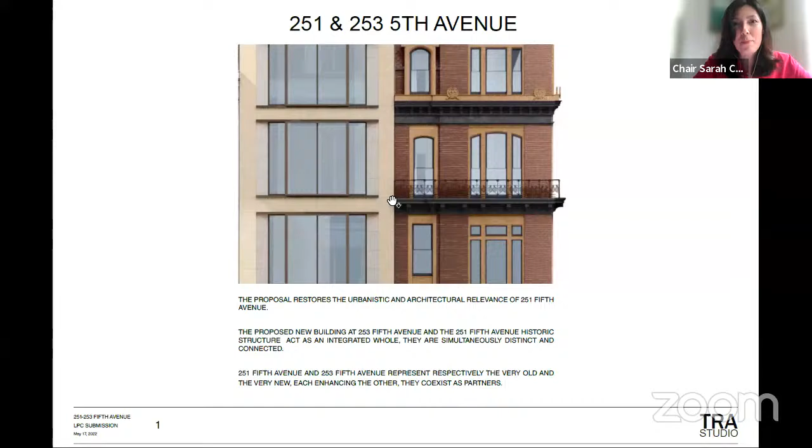Good morning. My name is Caterina Roiatti. Together with Robert Rabosch and Winston Wolf, we represent TRA Studio, the architects for the proposal. With us are also Fred Becker, Owners Counsel, and Isaac Obel-Shalom, whose family has owned 251 and 253 Fifth Avenue for many decades. This proposal entails the restoration of 251 Fifth Avenue as per the 74-711 restrictive declaration and the replacement of the existing 253 Fifth Avenue building with a new mixed-use building.

On the 253 Fifth Avenue lot, careful analysis of the buildings in the historic district provided justification for a taller building without a front setback. Also, given the limited width of the site, a small encroachment over the historic building was deemed appropriate. As part of the declaration, we are asking for modifications for bulk only to propose a straight street wall and a small encroachment.

The site is located on the edges of the Madison Square North Historic District in the middle of a very dense area. It comprises 2 buildings on a merged corner lot. The 251-253 site is urbanistically significant. The buildings will enjoy direct sight lines from the Empire State Building and the Flatiron.

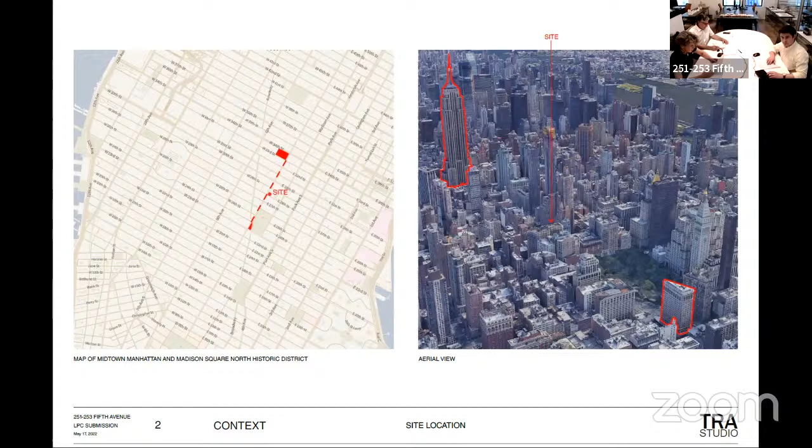The historic landmarks will be visible from both, and just as originally intended, directly from the park. A neighborhood of exceptions: the Madison Square North Historic District is a neighborhood marked by the exceptions to the grid generated by the Broadway corridor, as well as by architectural exceptions, diversified typologies, and a vast collection of styles, materials, and scales.

Buildings range from 3 to 28 stories in height, all attesting to the successive development phases. The Madison Square District is not new to sculptural forms. It is in fact anchored on the south by the very sculptural Flatiron Building and to the north by the Empire State Building. The diversified character of the context, as illustrated in the following streetscape panoramas, could not be more visible than in the area surrounding the site, where the exception is the rule.

The intersection of Fifth Avenue and 28th Street is not a site where appropriateness calls for a design that recedes. Excerpts from the LPC designation report.

251 Fifth Avenue, built in 1872, is one of the earliest surviving apartment buildings intended to attract mostly single men. It was designed in Queen Anne style by George B. Post. As described in the Landmarks Preservation Commission designation report, it originally featured a pyramidal crown with dormer windows that would have been visible from Madison Square Park.

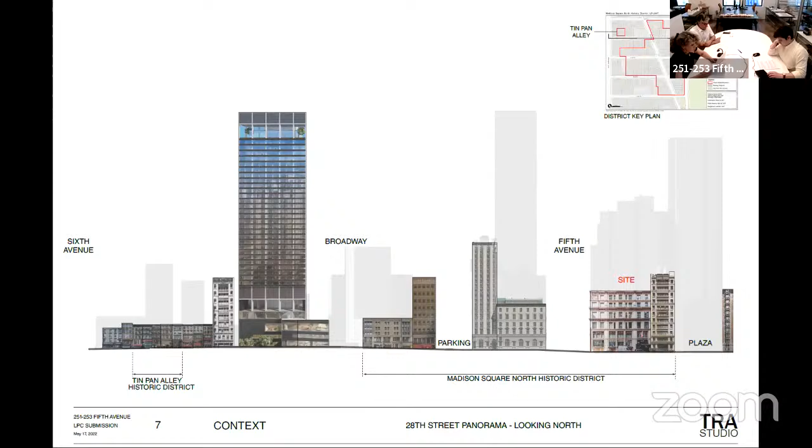It is interrupted again by the hotel parking, followed by the tower, to culminate in the McKim, Mead and White building. On the other side of Fifth Avenue, the district ends with our site and a tall loft building, before the void created by the plaza of a modern high-rise.

The statement, which was discussed at the CB5 meeting, that historic buildings have a tripartite geometry simply does not apply to this stretch of Fifth Avenue. An example of a tripartite facade can be seen at 218 Fifth Avenue. It will be shown on page 12 later.

Panorama, west side of Fifth. Obviously this is not our side of the avenue, but it's interesting because all heights are represented.

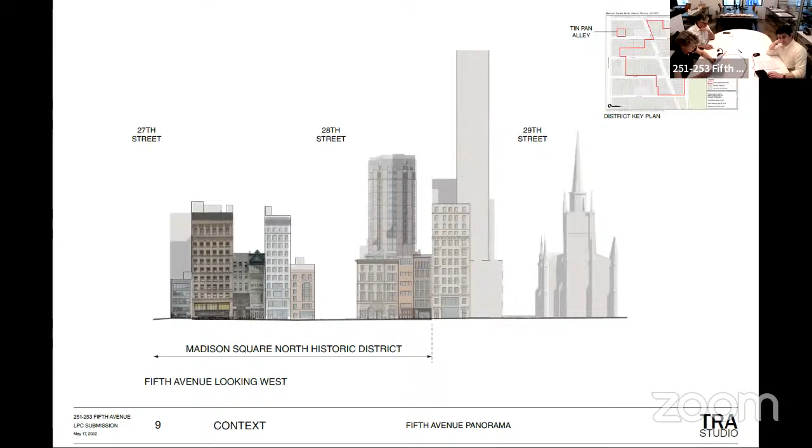Heights comparison of buildings in the historic district. The careful analysis of the existing tall buildings enabled us to build a strong rationale for proposing a taller building on the 253 Fifth Avenue portion of the site. The heights of the proposed building will fit in with a variety of heights found throughout the historic district, which reach 28 stories.

The proposed development, comprised of a tall tower and a lower building, is in harmony with the massing of the buildings in the district. Tall buildings in the historic district all have a strong street wall, rising without a lower setback.

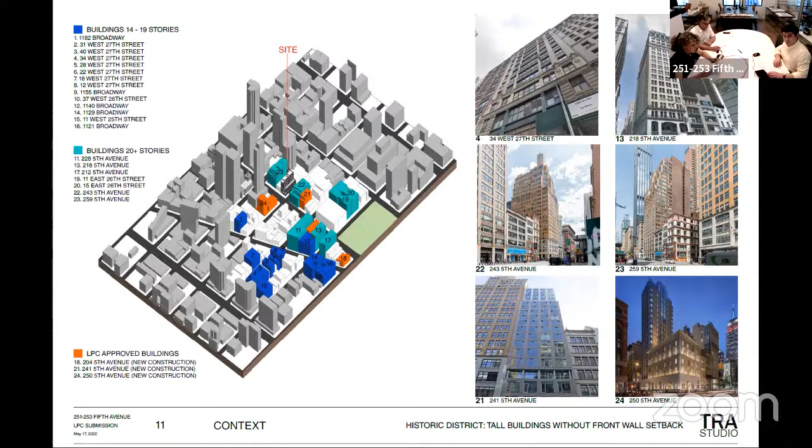Surrounding development: the zoning mechanism applicable on a wide street is the tower on a base. This massing does not exist in the district—it's essentially a modern approach based on requiring setback at the lower levels. The developments in the surrounding area that apply this zoning massing have not been successful, as seen at 309 Fifth Avenue, bottom right of the page.

Important to notice that the views from our site to the Empire State Building have been preserved through the forest of tall buildings that have been built or will soon be built.

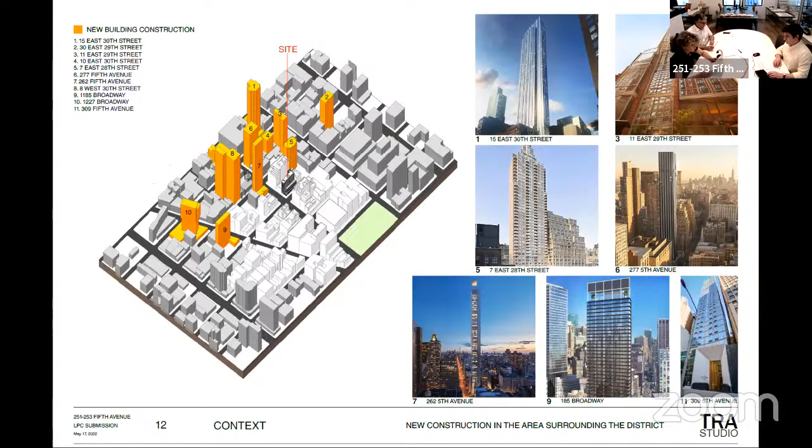Robert? Hi, my name is Bob Trebosha. I'm going to go through the 253 new building.

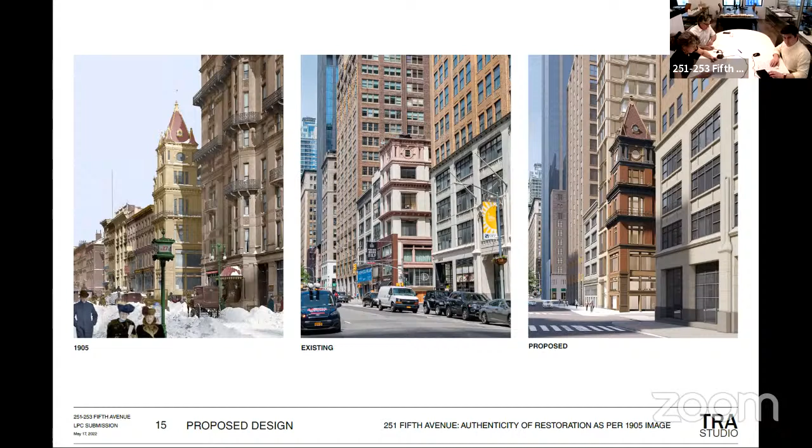Strategic massing: the R10 zoning allows, with inclusionary housing, a maximum of 12 FAR, 89,100 square feet, plus mechanical deductions. The zoning mechanism applicable to a wide street is a tower on a base.

This massing does not exist in the district—it's essentially a modern approach based on requiring a setback at the lower levels. The developments in the surrounding area that applied this zoning massing have not been successful.

The design of 253 Fifth Avenue was guided by the idea that the air parcel above the historic structure contains DNA data to inform the design of the new building. In particular, the slopes that define the pyramidal crowns and the mansard roof extend and sculpt the new structure, tying 253 and 251 Fifth Avenue into an integrated whole.

The uneven grid and controlled asymmetry of 251 extends through the 253 facade. The old and new buildings are obviously different in scale, but they are indeed in harmony.

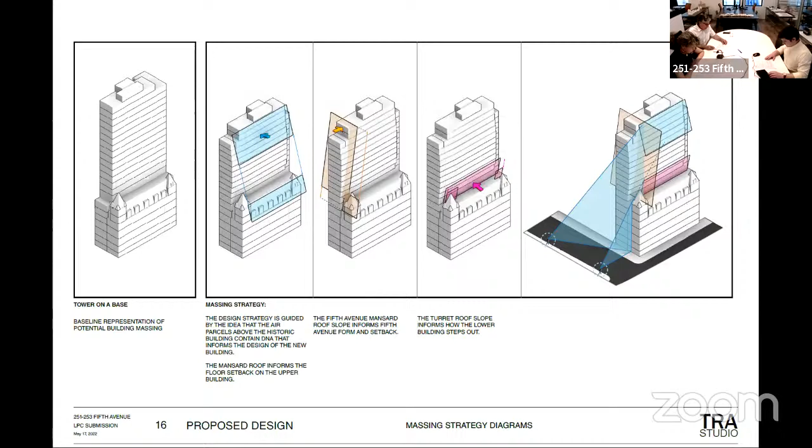Within the sloped planes, 253 Fifth Avenue sculpts itself into a form that is at once innovative and reminiscent of the mansard roofs and step setbacks found in the area. The proposed building is in alignment and at scale with the streetscape.

Building facts. The proposal entails a full restoration of 251 Fifth Avenue as per the 74-711 mechanism, which offers to request a variance for the proposed new building for bulk only.

TRA proposes the replacement of 253 Fifth Avenue with a mixed-use building whose massing reinforces the street wall. A small encroachment is proposed on the north side of 251 Fifth Avenue. The first three floors are commercial with residential above.

Approximately 88 apartments are proposed, of which 30% will be affordable housing units. These units will be interspersed throughout the building, bringing much needed apartments to an area that was, before becoming commercial and manufacturing, a vibrant residential neighborhood. This is certainly an area that can support the additional density and benefit from the introduction of additional residential units, including an affordable housing component.

Floor plans. The elevator is moved away from the historic building, minimizing the impact on the adjacent historic structure. This somewhat unusual move also allowed for very efficient layouts that take full advantage of the south wall legal light and air. The balance of the party wall between the two buildings is maintained at the lower commercial levels.

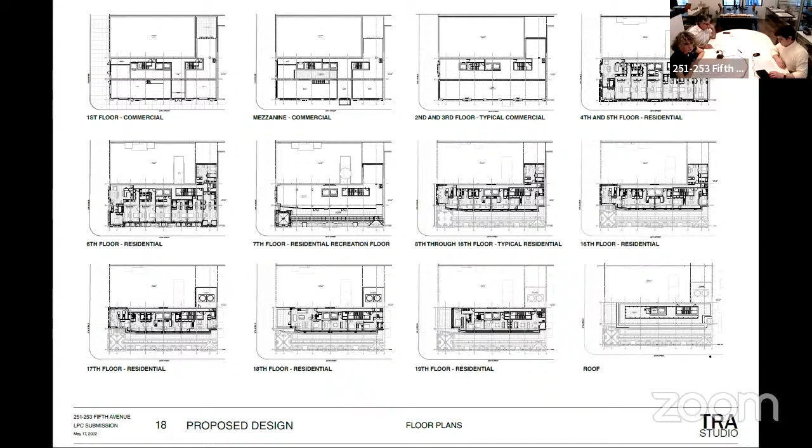The small encroachment of about 6 feet 6 inches was demonstrated to be necessary to create a variety of apartment sizes, with the smaller studios located in the narrower sections of the building.

Cantilever precedents. The site of the new building is only 24 feet 9 inches wide. Early in the design process, it was understood that a small encroachment over the historic structure could be considered. A review of past approvals demonstrates that buildings with rather large cantilevers have been approved in historic districts before.

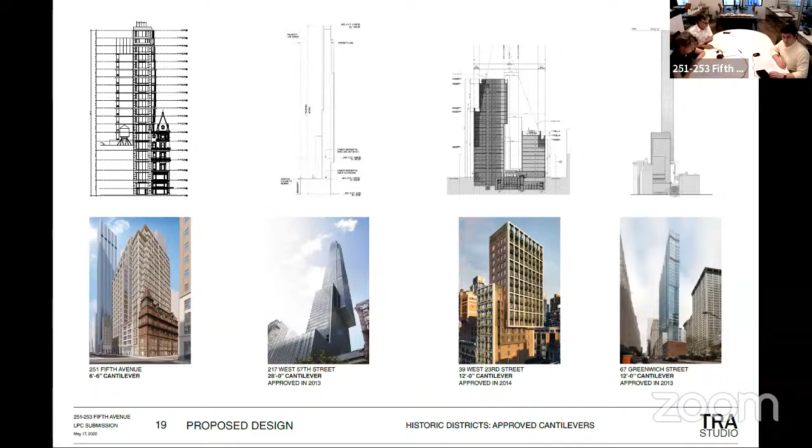It is characterized by large windows that mark the commercial use, set within strong mortar-set terracotta tiles. The facade dematerializes on the upper floors into smaller windows and glazed shaped terracotta tiles. The top is stepped, similar to the other tall buildings on this stretch of Fifth Avenue.

The design of the south wall, which takes full advantage of the available legal light and air, recognizes that since 251 Fifth Avenue can never expand vertically, it is not just a demising wall, but rather a facade. Similar historic examples are referenced in the presentation.

On the 28th Street side, the window wall rises into a large dormer, a gesture similar to the top dormers of the adjacent building. It also shifts the weight of the building away from the Fifth Avenue main facade.

The modular organization of the facade, taken from the Queen Anne style of the 251 facade, is regular but not exactly symmetrical, without a center axis. A muted palette is chosen both to harmonize with the masonry of surrounding buildings and to provide a backdrop to a vibrantly colored historic building, enhancing its significance.

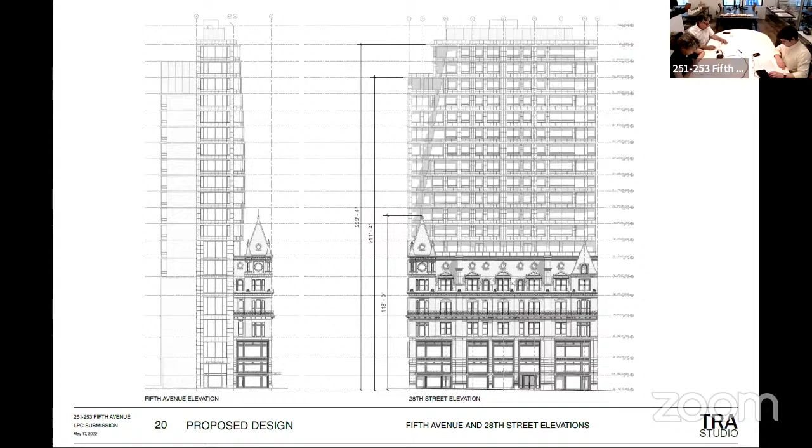The corner site provides ample justification for the bold transformation of both 251 and 253. Together, they celebrate the historic grandness of form and the extravagance of the diverse neighborhood context. Traditional materials are used to create a new form. The design finds connections, not replication.

The architectural assembly and composition of the new building's facade weaves together and celebrates the varied forms of architectural expression in the district. The somewhat uneven grid, the surprisingly slightly asymmetrical geometry of the historic building, and the variety of recesses guide the design of the new building.

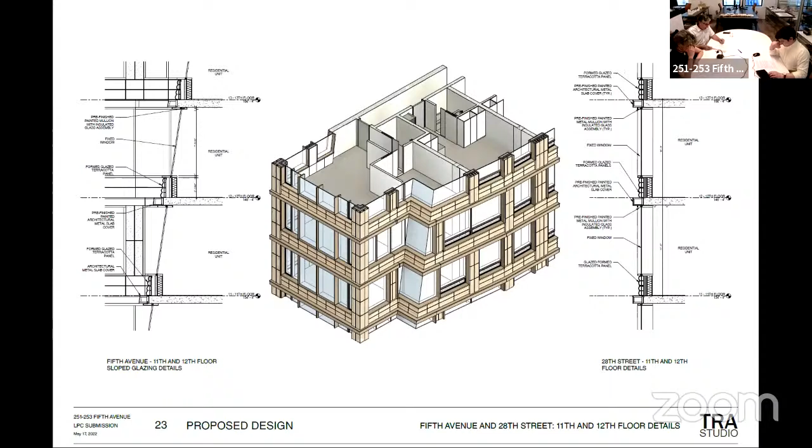253 Fifth Avenue, window wall close-up. The Fifth Avenue strong base establishes a clear hierarchy between the primary and secondary facade. In contrast to the flat mortar set tiles that clad the base, the secondary facade is clad with shaped, multi-layered glazed terracotta panels, whose extruded forms recall the scoring and abstract patterns found on masonry buildings located throughout the district.

253 Fifth Avenue, close-up of 28th Street window wall. The residential floors' fenestration is characterized by grouped windows. The abstract decoration, which creates an interwoven effect at once repetitive and varied, is obtained through restrained gestures. Only one extruded glazed terracotta panel and one type of unglazed flat terracotta panel tile are utilized to produce a facade evocative of historic detailing, maintaining contemporary and timeless expression.

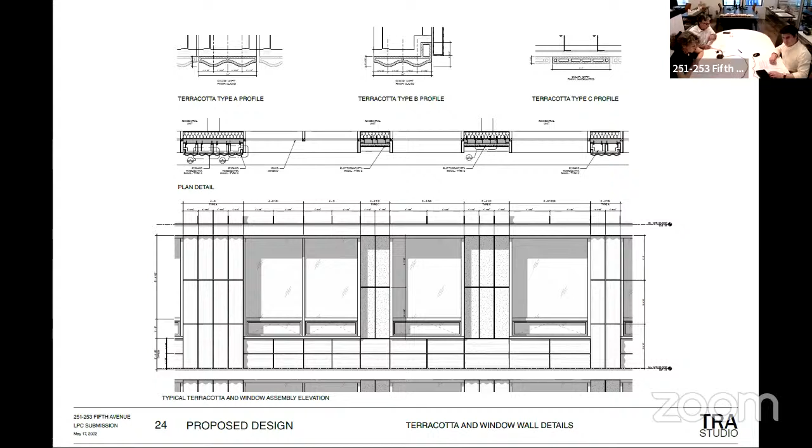253 Fifth Avenue, close-up rendering materiality. The modular organization of the facade and the muted palette is chosen both to harmonize with the masonry surrounding buildings and to provide a backdrop to the vibrantly colored historic building, enhancing its significance.

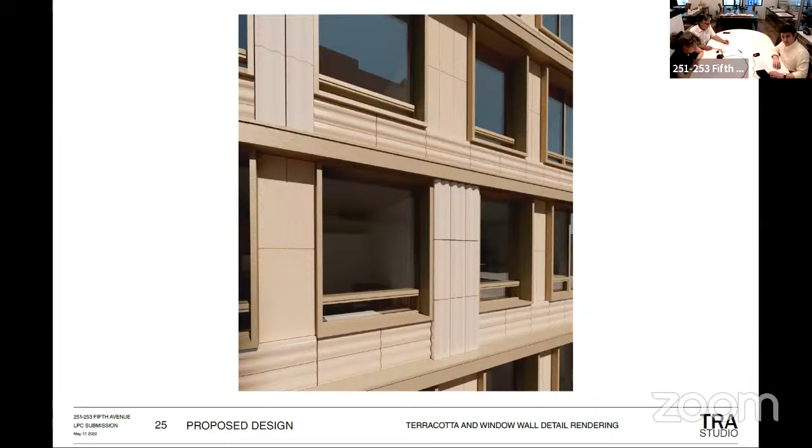253 Fifth Avenue, close-up of 28th Street window wall upper floors. The 28th Street facade extends into what can be called a larger dormer. Similarly to the Kaufman Building 261 on the same block, note that the mechanical volumes are minimal. We took advantage of the oddly shaped dog-leg lot to locate the mechanical volumes away from the main facade.

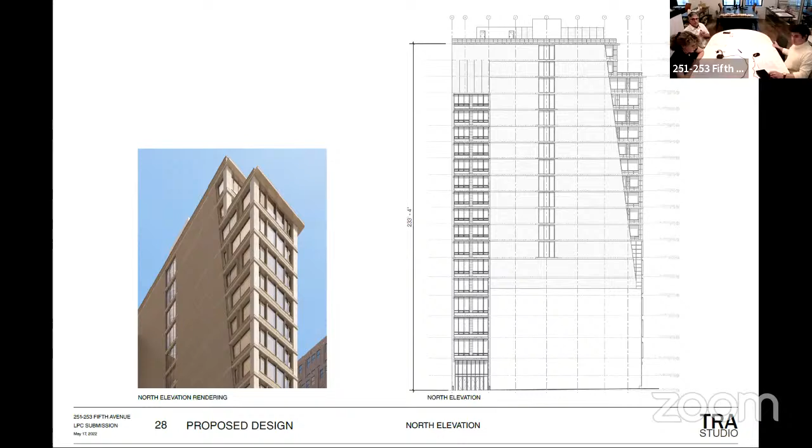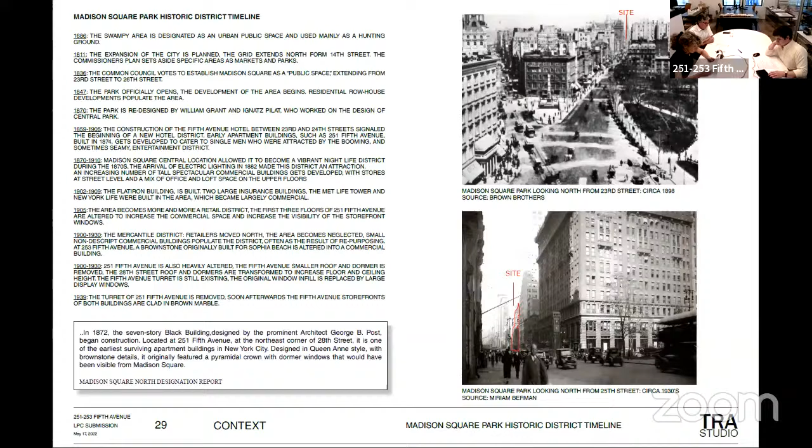Restoration of the 251 Fifth Avenue building. Historic District Timeline: the history, culture, and changes in the architectural landscape are reflected in the history of 251 and 253 Fifth Avenue. The image on top shows the district as seen from the park in 1898. The flamboyant sculptural rooftops were meant to be seen from Madison Square Park. The image below, which dates from the late 30s, shows 251 Fifth Avenue, even when surrounded by massive structures, remained recognizable as a landmark.

The Landmarks Preservation Commission stated that the authenticity of the restoration should replicate as close as possible the conditions of the 1905 photograph. In 1907, the mansard roof was removed, but the turret remained. The upper floor windows have been modernized.

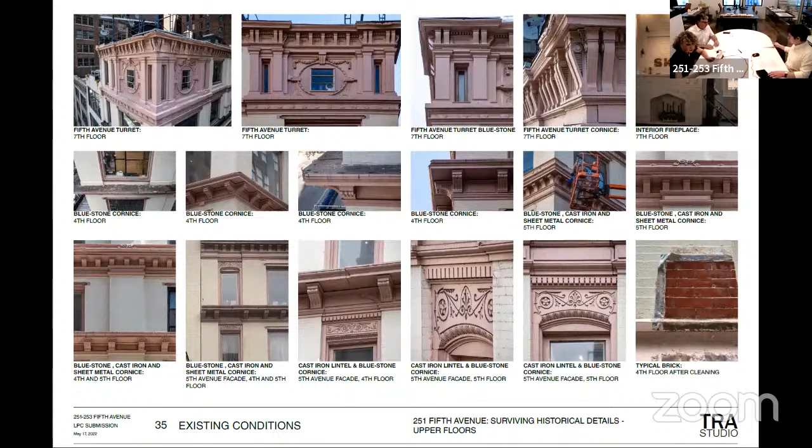Material analysis. Differing wall textures and mixed media materials are typical of the period and of this style of building. Currently, everything's coated in paint.

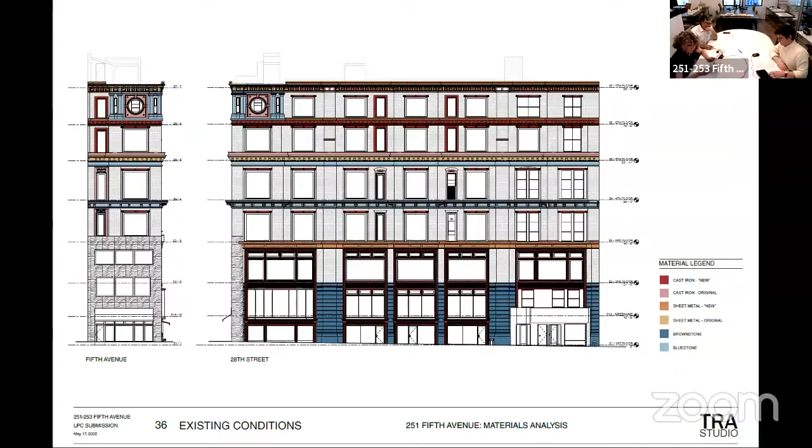The probing via boom allowed us to catalog the pieces as shown in this page, mapping the original surviving elements.

Preservation always requires us to choose what to keep and what should go. This is our mapping of the facade, guided again by the intent to adhere to the 1905 image.

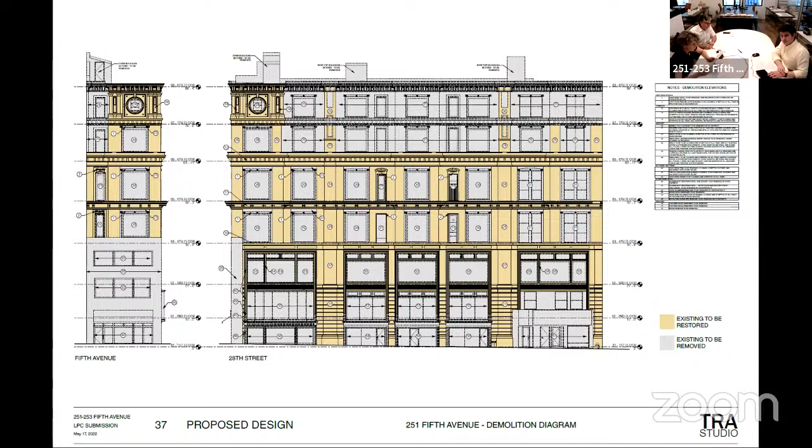Proposed restoration. The original storefront, transformed in 1905 following the repurposing to commercial use, comprises the first mezzanine and second floor. The storefront seen in the reference image shows large expanses of glass, a feature recognized in the restoration. The details of the new infill are in kind with the surviving elements.

On the third and fourth floor, the original tripartite windows, still visible in the 1905 photos, were soon after gutted to allow for more visibility to the commercial spaces behind.

The proposed restoration entails the restoration of the cast iron lintels and wood double-hung windows, as seen in the 1905 photograph, with the detail and depth of the window assemblies.

The restoration also recognizes the urbanistic significance of reproposing the reconstruction of the rooftop elements in natural slate roof. A long metal and glass skylight, not visible from the public way, gives light to the loft apartments below and conceals the rooftop railing and recreation terrace behind.

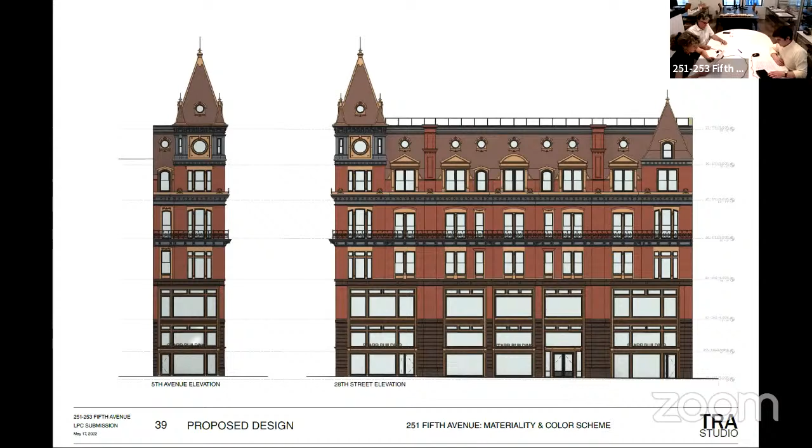Materiality paint analysis. The original red brick facade, brownstone and bluestone cornices will be returned to their original unpainted state. The contrasting proposed paint colors are based on careful microscopic paint analysis.

The proposal provides a handicap accessible entrance to the historic building. Currently, the retail is located approximately 48 inches below the sidewalk.

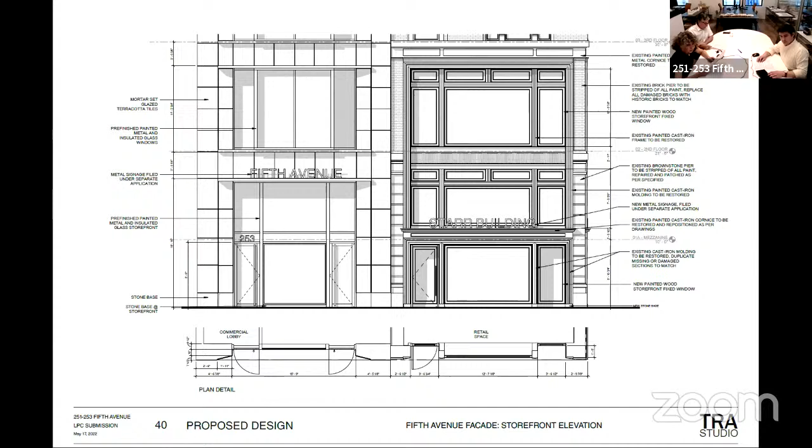Existing elements are to be reused and any new elements will be replicated in kind. Storefront mullions will be painted wood.

Storefront details. The storefront occupies the first floor, mezzanine, and second floor. The storefront seen in the 1905 reference image shows large expanses of glass, as we said, a feature that...

Our meetings with the staff indicated needed to be recognized in the restoration. The details of the new infill are in kind with the surviving element.

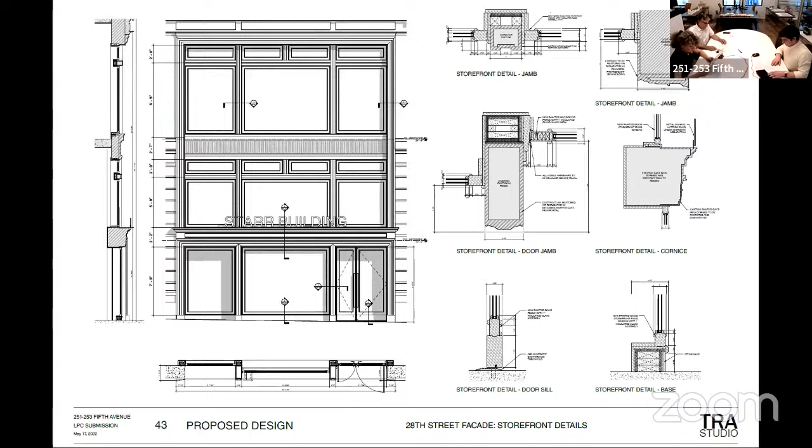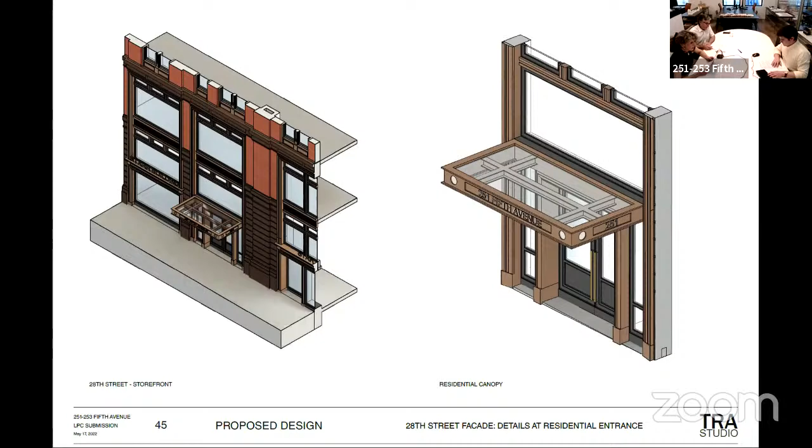Axonometric marquee detailed view. The integration of the marquee brings functionality to the historic storefront. The modern design is simple and strikes a balance between the historic and the new use of the storefront.

Marquee details. The proposal includes concealed minimal perimeter lighting.

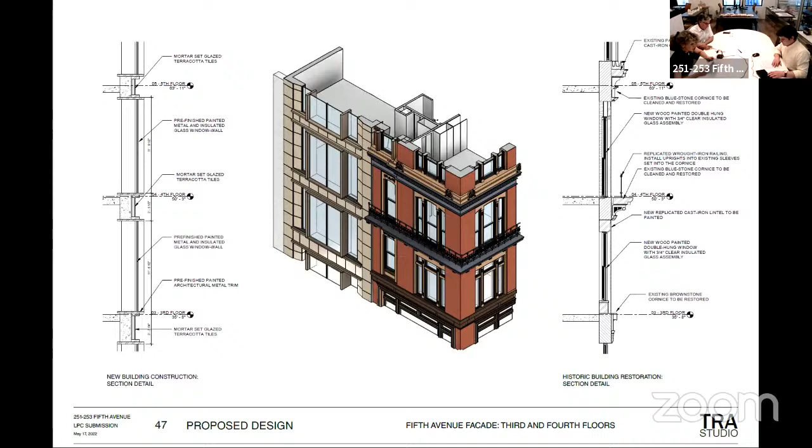Residential floors. The third and fourth floor facade, seen here of the two buildings side by side, shows that the new and historic windows find a dialogue. They share depths of fenestration, natural materials, and scales.

Residential window detail, this is of course 251. The introduction of the cast iron lintel and columnettes that had been gutted to allow for showroom windows is re-proposed. They will be replicated in kind.

The windows, as we said, will be wood double hung, painted in the original black-green color.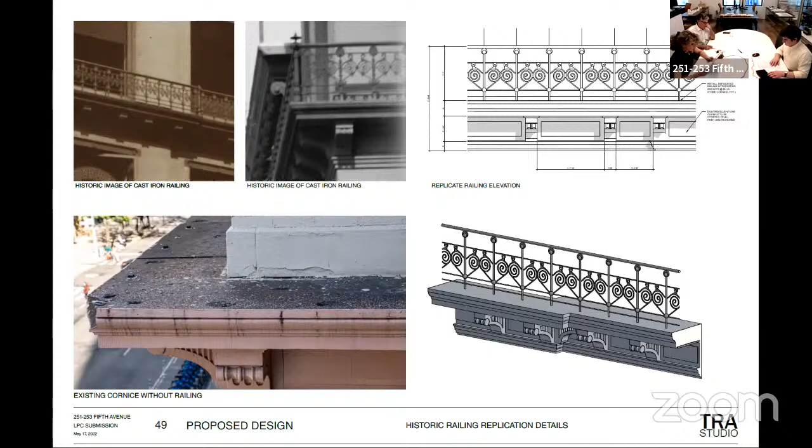Railing. The memory of the railing sockets in the bluestone cornice are still visible. This enabled the modulation of the railing to be exactly determined in order to replicate the railing in kind.

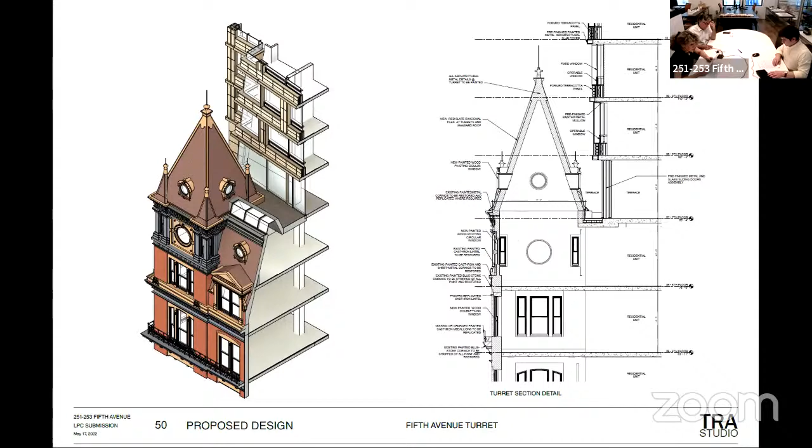Axonometric view of the turret reconstructed. The mansard, turret, and flat roof are to be reconstructed as per the 1905 condition documented in the photographs. The window wall of the new building recedes at the roof level to recognize the turret.

Oculus details of the turret. The probes uncovered several architectural details in blue stone. Blue stone was used where structural considerations were a concern. The proposed design leaves the blue stone in its natural state.

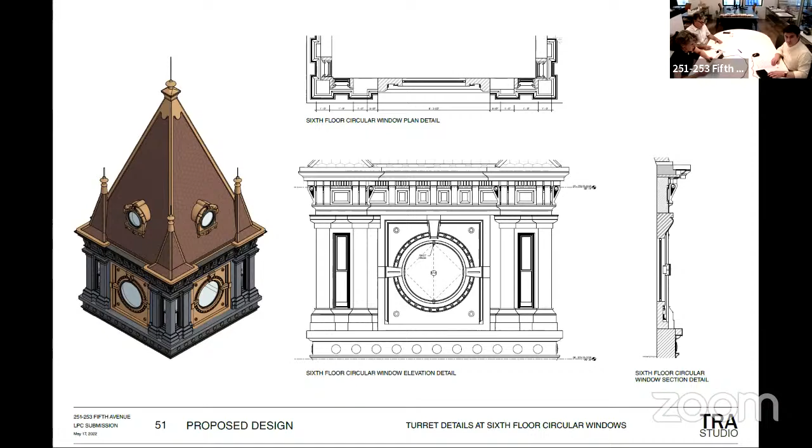Skylight. A metal and glass skylight, not visible from the public way, gives light to the loft apartments below and conceals the rooftop railing and recreation terrace behind. The study shows that the skylight is minimally visible from the public ways.

Ocular windows. Reconstructed ocular windows and surrounding area are to be replicated. The windows will be operable and pivoting, and of course, wood.

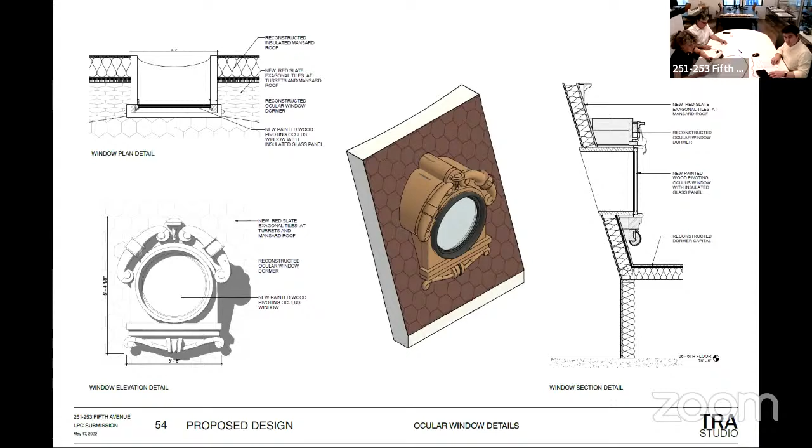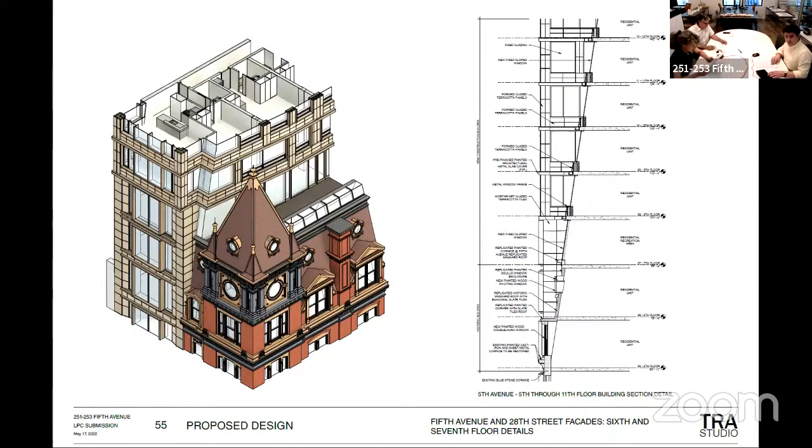Connection between 251 and 253. The reconstructed Fifth Avenue mansard roof, which you can see in between the two buildings, reaches up to establish a dialogue between the historic and new elements. Dormer details: the reconstructed dormer and surroundings are to be replicated. The dormers will receive operable double-hung wood windows.

251 and 253 together, two buildings as partners. Materiality: the historic building restoration is informed by the existing materials and paint analysis. They include bluestone, brownstone, brick, wood, cast iron, galvanized metal, and slate. Most materials would be left in their natural state.

The materials proposed for the new building are historically used in the district. They include terracotta brick, stone, and metal.

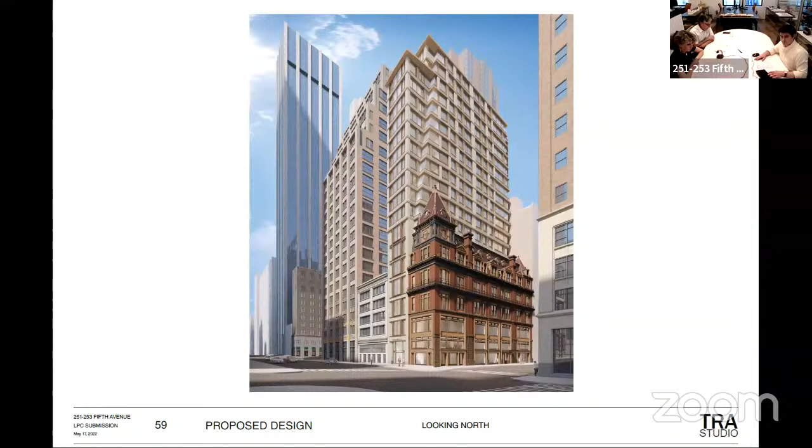View looking north. The new building is both appropriate and harmonious within the architectural landscape and provides a setting for the historic building. Fifth Avenue elevation view: the new building is in scale with the surrounding buildings. The reconstructed turret has a clear silhouette that will remain clear against the skyline.

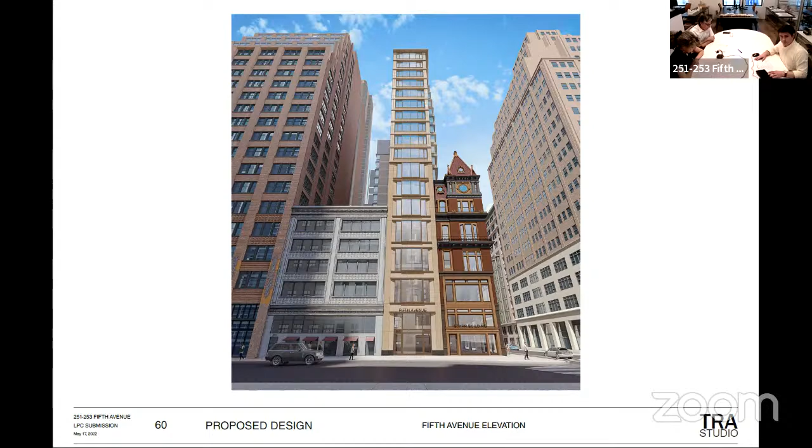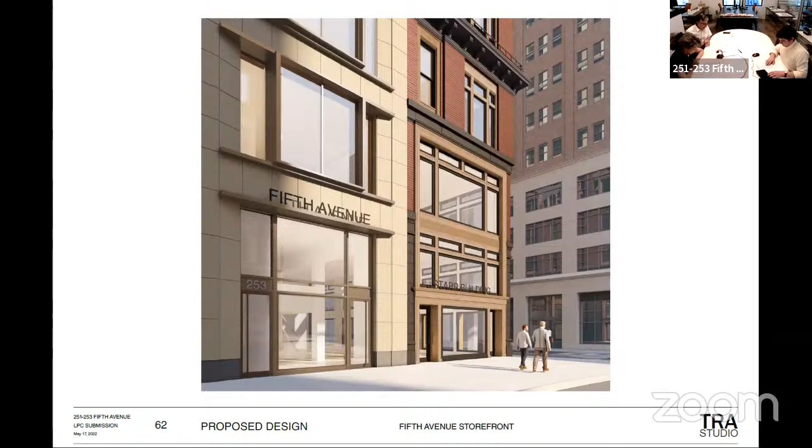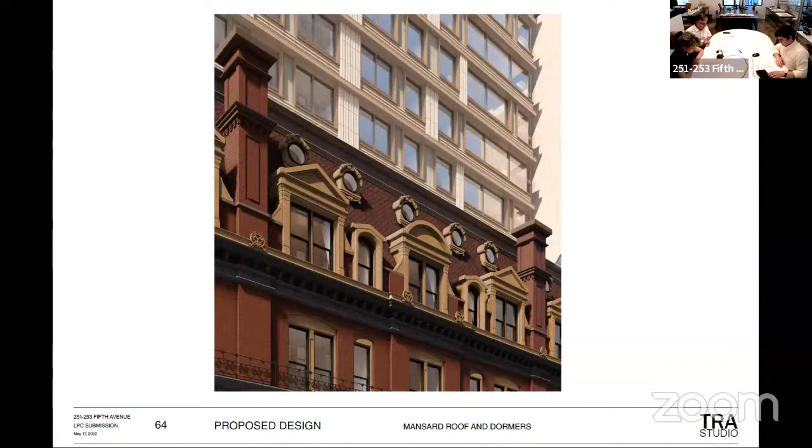Views of the mansard roof. The new building provides an appropriate setting for the vibrantly colored historic structure. The detail and depth of the new window assemblies reference the richness of details in the historic building. The restored turret: a close-up view of the turret highlights the sculptural form of the reconstructed historic building.

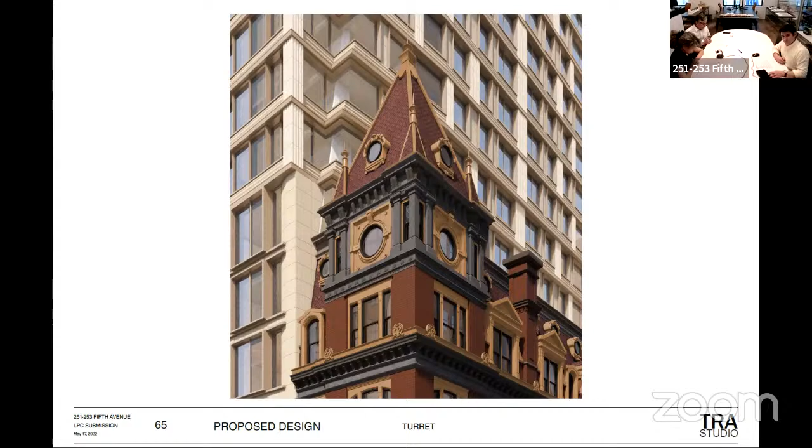Rendering. Significance in the streetscape: vista up Fifth Avenue with views of the Empire State Building.

The regeneration of 251 Fifth Avenue is a statement of urban regeneration. 253 Fifth Avenue enhances the presence and significance of the corner site and historic landmark. Together, the new and historic buildings add to the public realm.

Thank you. Thank you. For it.

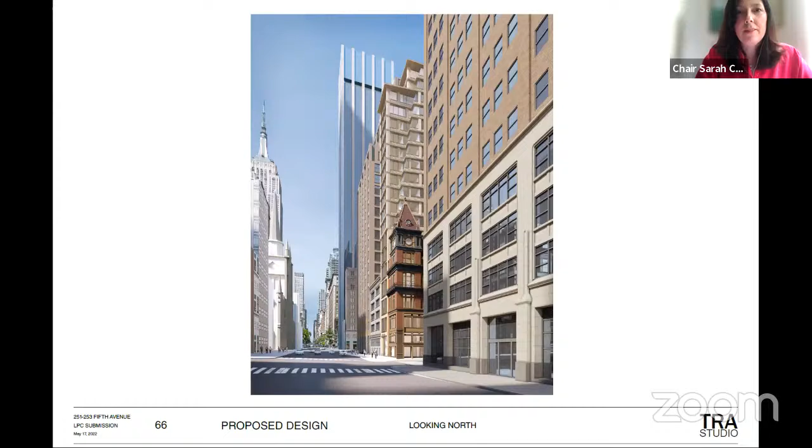Okay, great, commissioners, do we have any final questions? I'd just like to make one point about the cantilever. The cantilever yields to the post building. We do not believe that a projection off a building at 90 degrees is an appropriate solution for this cantilever. We sensitively developed this cantilever to move with the gesture of the post building. So in our eyes, the appropriateness and creativity of this cantilever is in keeping with the creativity of the post building in its day when it was built. This is a site that wants creativity, imagination, forward thinking, and I can't think of any other way to present this building in light of the challenges that we had to overcome to even consider a building that wasn't a plain box.

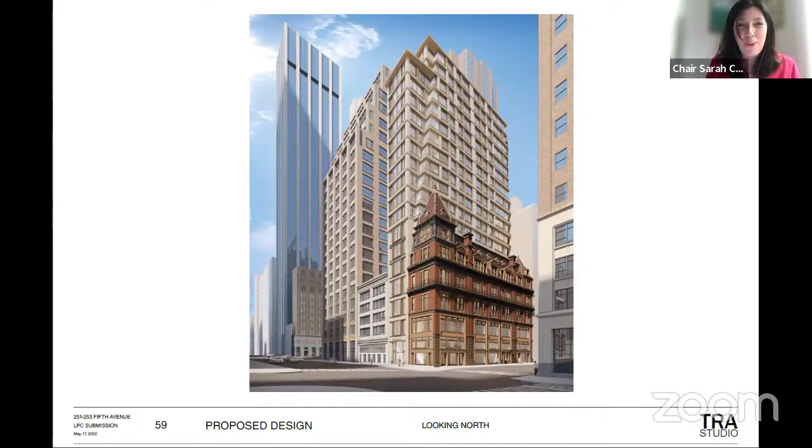Okay, we'll now do public meeting item number 3, LPC 22-07348, an application for a certificate of appropriateness in the Borough of Manhattan, Block 1389, Lot 45, 38 East 75th Street in the Upper East Side Historic District. This is a row house designed by Thom and Wilson and built in 1881 to 82, altered by John Ingle in 1926. The application is to replace and redesign the front facade and construct rooftop and rear yard additions. This was last presented at the public hearing of May 3rd, 2022. No action was taken at that time, and the applicants will begin the presentation after we open the proceedings.

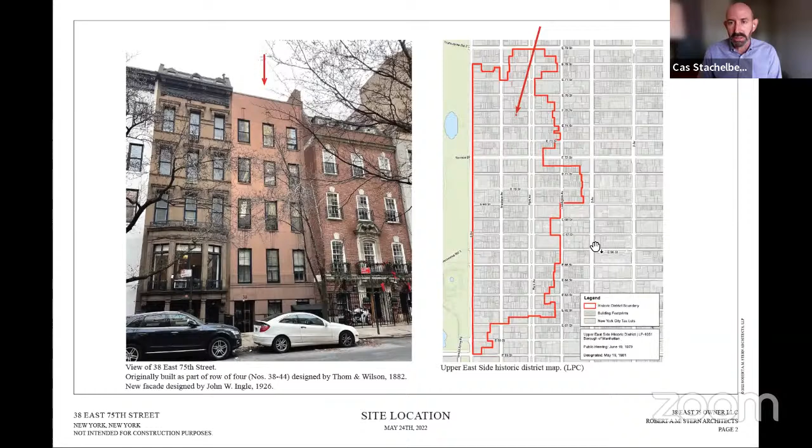Gary's going to share the specifics of the changes we've made, but I'd like to start by noting that we heard your comments. There were comments about a perceived heaviness and a lack of delicacy, and as is so often the case, absorbing your comments and responding to them has resulted in what we think is a better design.

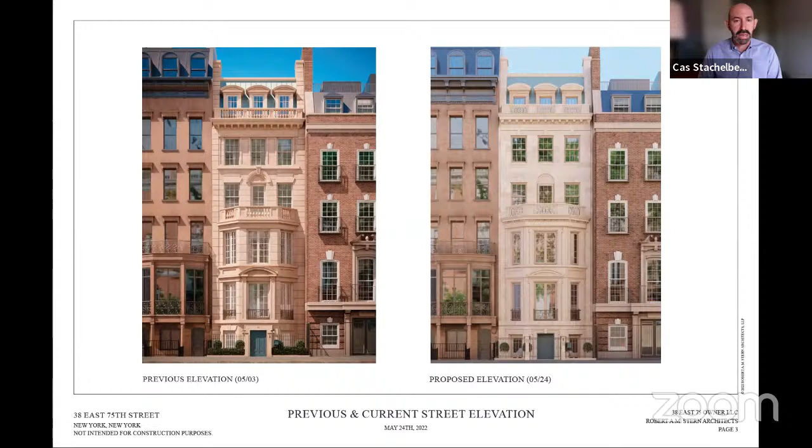What we shared with you at the public hearing, you can see here on the left. On the right is our revision. It is more restrained, more subtle detailing. It's a flatter design, but still has many of the neoclassical and restrained details that one sees in the district from buildings dating to the first quarter of the 20th century.

Looking at some of those buildings, we've included a few different examples. Without going through these in great detail, the point here is that both historically and under commission review, the district is filled with a range of facade articulations and detailing. There are buildings like these two, 8 East 64th Street and 10 East 67th Street, noted in the designation report, this one with an Adamesque style designation, and this with a neoclassical one, as compared to the more robust heavy Beaux-Arts detailing you see elsewhere in the district.

These are really what we are modeling our design on, but remembering that the firm of Robert A.M. Stern Architects has been doing this for many years, they are masters at what they do. This is not a design that is a kit of parts, but is really inspired by the buildings of the district, while being very much its own design.

So, a range of details and expressions across the facade and across the district, these more robust Beaux-Arts details, and then some of the more restrained elements seen in neoclassical detailing on other streets in the district. Worth mentioning as a reminder that since 1981, when the district was designated, through those four decades, the commission has approved a range of different new buildings, particularly limestone fronted buildings, almost exclusively in a traditional design idiom.

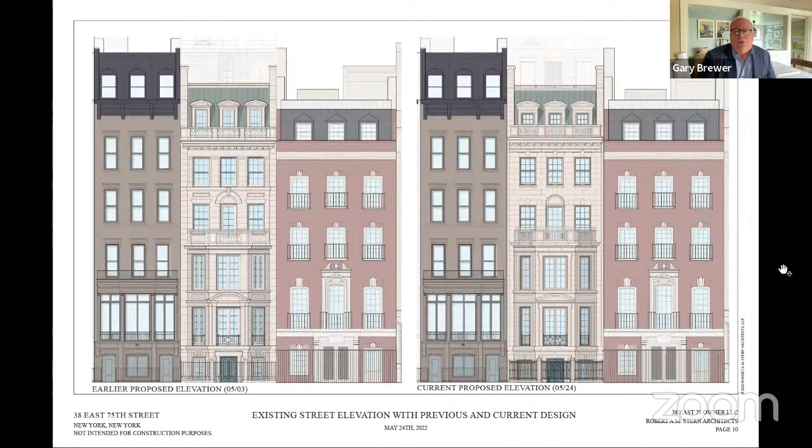So here you can see the changes proposed at the earlier meeting on the left and the current design on the right. At the bay, we've kept the basic bay but simplified elements. At the opening above the front door, we've simplified the surround, eliminating the split scroll at the over door. And then we've added casings around the second and third floor openings as opposed to the punched openings.

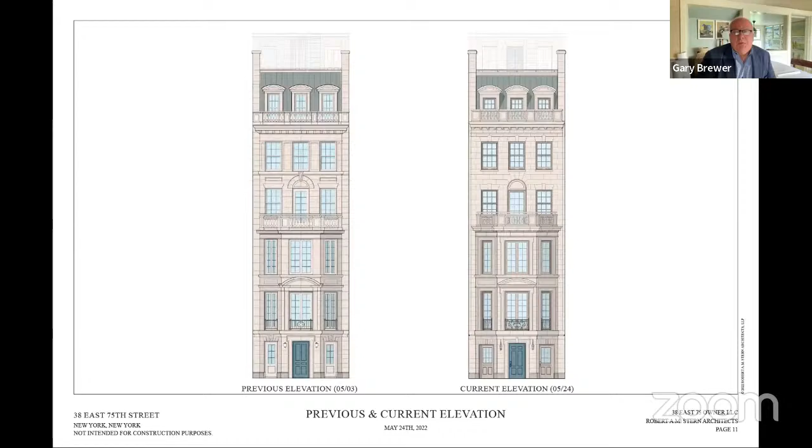Here are examples of historic buildings with somewhat similar treatments of elements. At the base of the building, we'd like to propose a rusticated limestone with a granite water table. At the over door above the front door, you can see a simple arched casing with cased openings and crossettes. The arch has been simplified. We've removed the arch casing and replaced it with voussoirs, similar to the Vincent Astor townhouse by Mott Schmidt.

We simplified the cornice detail, and so we are proposing a three-part cornice with a cyma, corona, modillions, and dentils. The biggest change is to the balustrade, both above the cornice and at the bay, to a woven style balustrade similar to what you see at the Colony Club, rather than the heavier turned balusters we proposed in the earlier design.

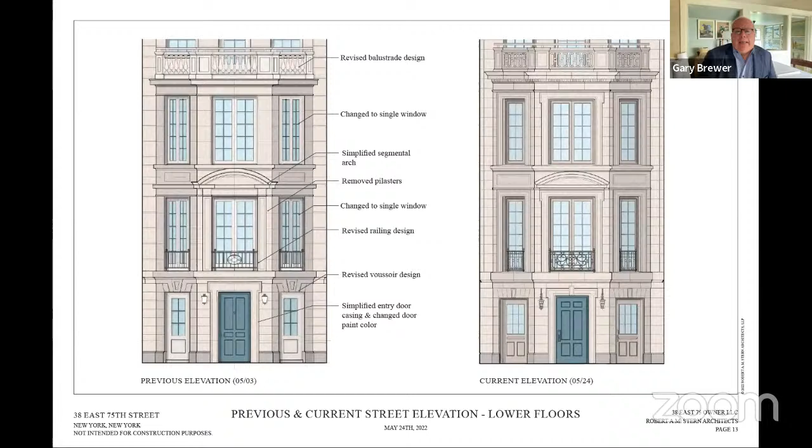Just for a little more detail, you can see the bottom three floors proposed on the left with the changes on the right, and the subtle modifications to edit and simplify it. And then again, the top three floors, the earlier proposed design on the left, and on the right the simplification of removing the belt course, changing the detailing of the arch, and removing the panels, plus the changes made to the balustrade and the dormers, which now have casings and arched over windows.

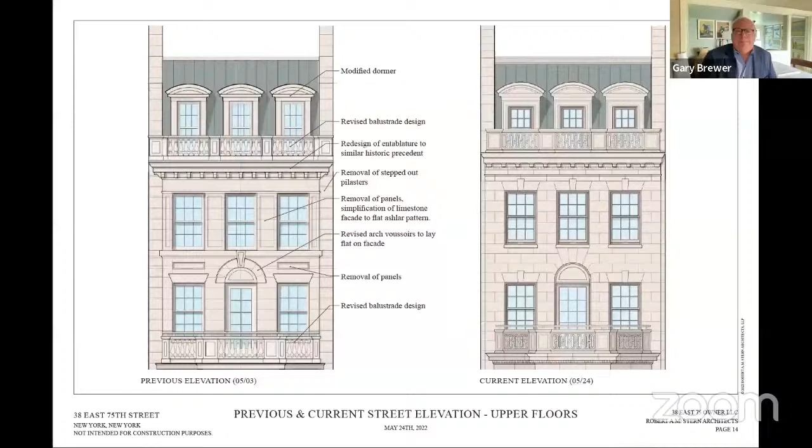Here are the proposed materials: limestone, granite at the base, painted front door, antique copper at the mansard, and then bronze for light fixtures, and black for the metal rail at the parlor level.

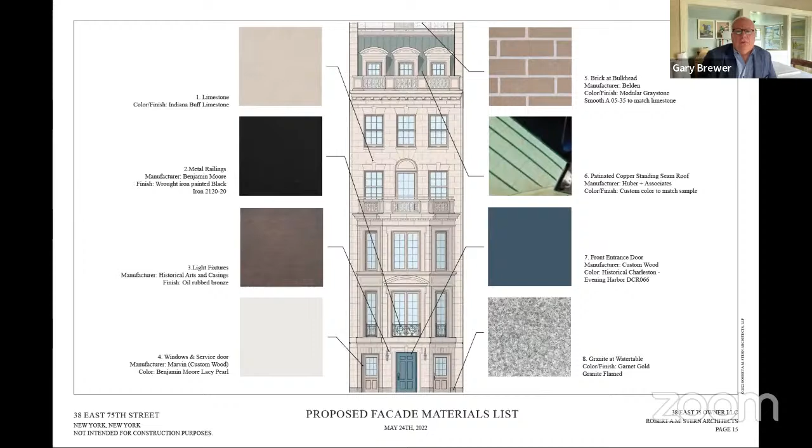As I started, I think the comments we heard from the board and the changes we've made have helped improve the design. I'm reminded of a quote by Mark Twain, who wrote, "I wrote you a long letter because I didn't have time to write you a short letter." So we've had a little bit of time to go back to the drawing board and simplify it, and in many cases, when one edits a design, it ends up being improved. So thanks for everyone's comments, and we look forward to hearing your thoughts about the design revisions.

Okay, thank you very much. First, commissioners, do we have any questions before we go into a discussion?

All right, I'm not seeing any questions.

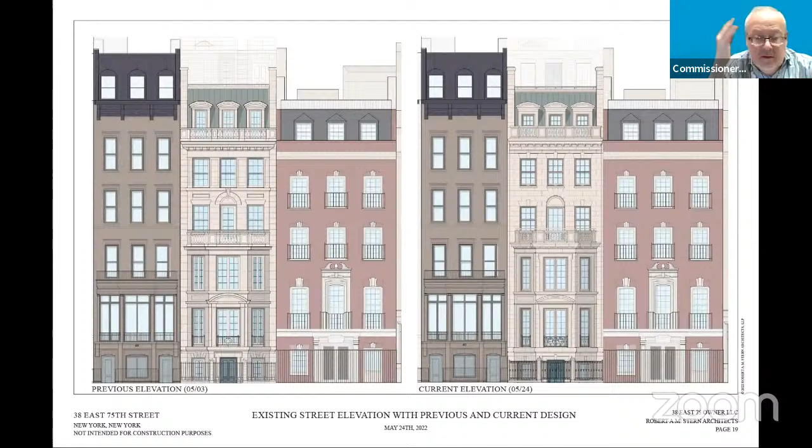First of all, I want to defend Commissioner Bland because typically he's not heartless - he does have a lot of heart, and he shouldn't play that down. But I completely understand Commissioner Bland's concern. Even if I'd never been familiar with this whole Board of Estimate issue, I do try to follow what the rule constraints are on us. So setting all of that aside, which I think I must, I am okay with what's been done here, which is to say the final product is acceptable. I think they hit the nail on the head in terms of the small improvements and tweaks needed to calm it down a bit. And so that I think is fine. I do wish I was in a different position here and could say I don't want this done at all, but we are where we are.

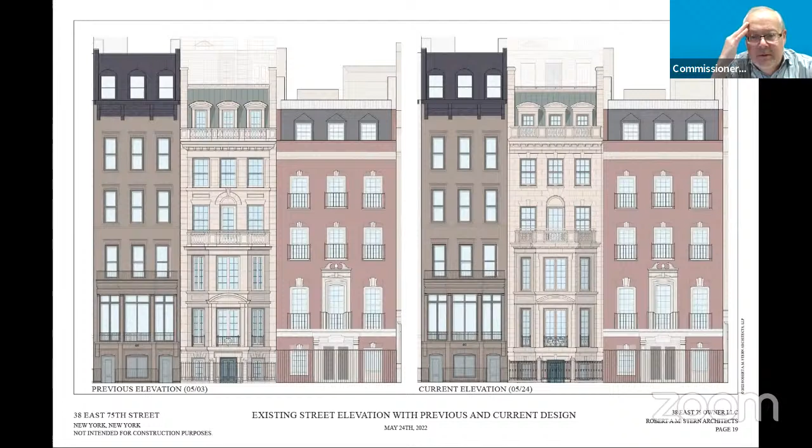Okay, thank you. And Commissioner Chapin, I think you were also comfortable with it as sort of a representation of the transitional changes in the Upper East Side Historic District. So what are your thoughts today after seeing the revised design?

I think that the applicant has been responsive and I can approve it as presented.

All right, and Commissioner Jefferson, I think you said that you could accept it, but you were concerned about the hierarchy of the facade and some of the details, and also lightening it up. So I wonder how the changes are making you feel now.

Well, I think it's appropriate. And it's very interesting to me because I realize now that there was a certain elegance to the first scheme, and because the proportions have changed on the second, the building is divided in two parts. There's the first two levels, and then the upper level, which is simplified. But in both cases, they're very well done facades, so I can approve it.

Okay, great. And Commissioner Chen, I think you specifically said that the rear was appropriate and that on the front you wanted to hear what other commissioners thought. So I wonder where you are today.

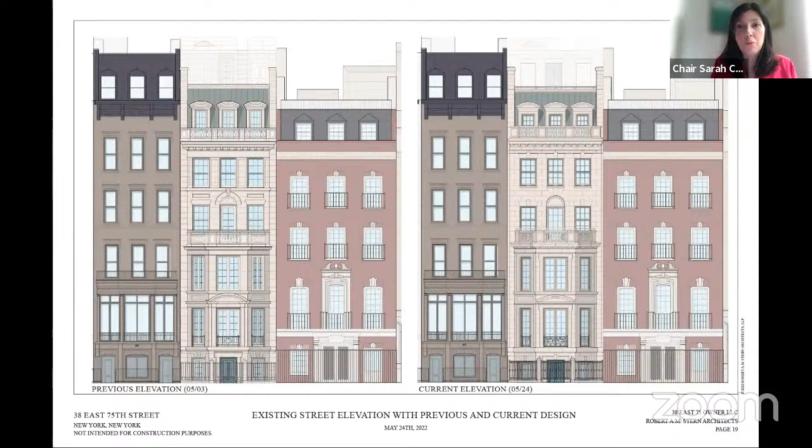I think that my concerns about the design of the entrance have not been addressed either. I think that Cass has shown us, I think it was, 12 or so buildings, only one of which had a lowered entrance. The overwhelming majority of buildings that are new designs for new facades in the limestone style, classical styles that he's reviewed, have gone out of their way to regularize the entrance and make it have a more formal relationship with the street. The entrances that are down are clearly modified brownstones where the budgets were lower, most likely. And I think it's kind of against the type for me, in my understanding of that district, to have such an elaborately designed new building with a compromised entrance of that nature.

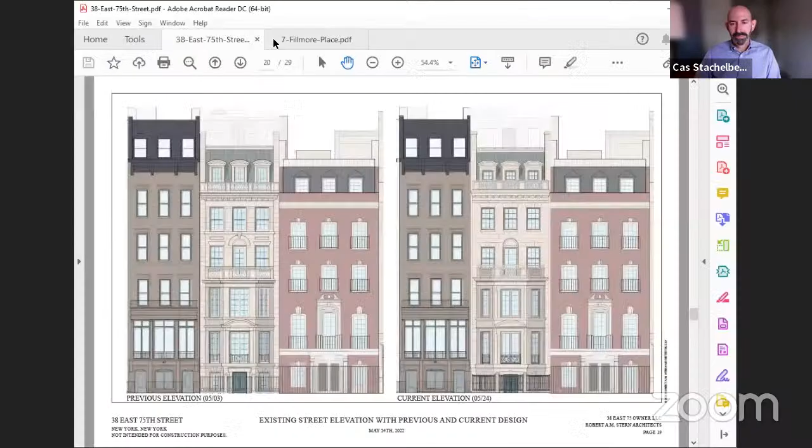We'll begin with public hearing item number 1, LPC 21-10217, an application for a certificate of appropriateness in the Borough of Brooklyn, Block 2367, Lot 43, 7 Fillmore Place, in the Fillmore Place Historic District. This is an altered colonial revival style garage building built in 1912. The application is to replace windows, doors, and ironwork and construct a rooftop addition and other rooftop elements.

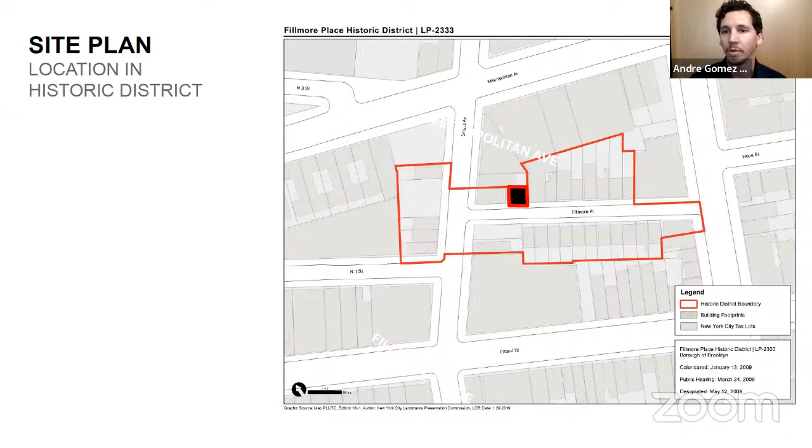And because that bulk is so visible from Fillmore Place — actually, I don't believe that particular parcel is a historic designation, but because it's visible from Fillmore, that's why it's relevant to the presentation.

You see the open space I was talking about earlier, calling attention to the parcel to the north of us, which is proposed as a 7-story building, 5 plus 2 penthouse type masses. Definitely a lot of visibility from Fillmore. It's almost directly to the north of us, one parcel behind, a 25-foot parcel or so. So a lot of visibility from this mass as you look towards our project.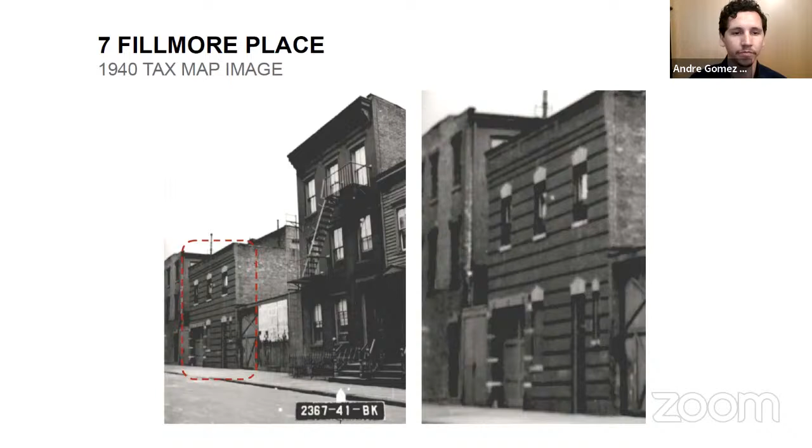Talk about the current conditions. We're lucky enough to have a 1940s tax map image, so we've been using this as our North Star going forward with our design and design decisions. You can see the beautiful brickwork of this former carriage house, the carriage doors, the stone lintel, really strong horizontal lines with the brickwork, although a relatively simple facade. Here's where we stand today.

Current condition: we're fortunate enough that the majority of the structure is really intact, at least on the exterior. A lot of the brickwork, although severely damaged and vandalized, is mostly intact. And so the intent is to preserve this as much as possible, to restore this as much as possible, really focusing our historic efforts on the brickwork, the stone lintels, the stone cap, the simple rectangular paneling at the top of the cornice, and then bringing it up to a current living standard for my client, and making it a home. And so that'll include new windows and new doors, and a few other amenities in order to make this current and livable.

So part of our facade restoration plan, I'll start with the front elevation here. As I was saying, all the original brick matched and replaced, the stone lintels matched and replaced, and then new openings. I'll talk first about the windows, which has been a topic of discussion throughout our process. So we're proposing a painted metal window. I'm showing the painted metal in like a dark charcoal type color. We are proposing aluminum, doing so for durability and long-term maintenance. We also want the maximum opening size, just to get the best ventilation we can for the interior. And we also are proposing a bifold door at the ground floor.

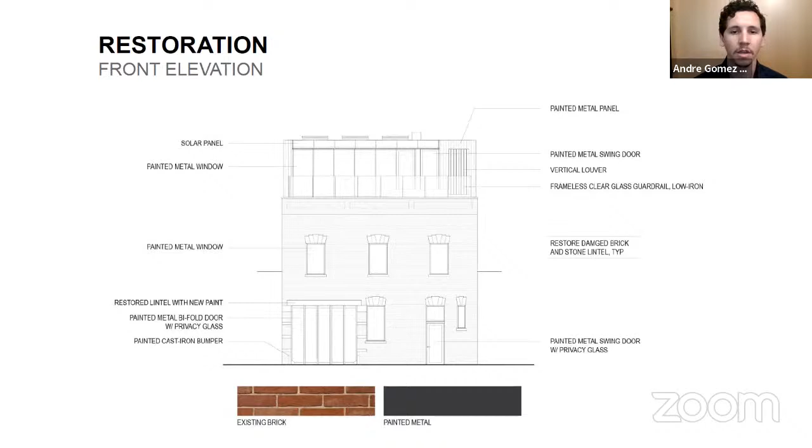There is a frameless clear glass guardrail, which I'll talk more about as we go on. That's because the roof is occupied, and we have some existing conditions with the steel in the roof. As we build a new roof on top of that, we need a guardrail. Because the existing parapet height is not tall enough to serve as a guardrail, we've done this as a frameless clear glass guardrail, low iron, no cap. The idea is really that this is as invisible as possible.

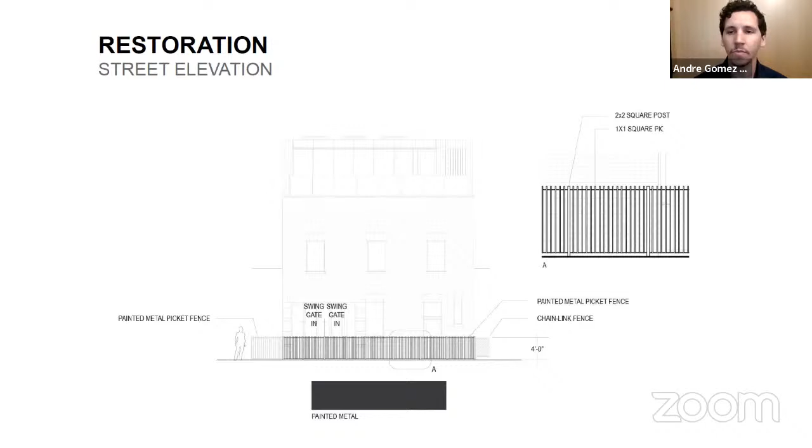On the street elevation, we have fences on either side at about 4 foot tall. We're proposing to match that height with a 4 foot square picket fence type design. Simple, no ornamentation, don't want to detract from the building, just metal picket, simple design. In a painted metal, the painted metal will match the color of the windows in like a dark charcoal.

Side elevation, we have the adjacent 1-story building. There's 1 story above of existing stucco. And then the rooftop bulkhead addition at the top in a painted metal. Painted metal is in the charcoal family, sort of matching again what we have in the windows and some of the detailing and that secondary color to complement the brick. You see the solar canopy there.

We did end up reducing that during the design review process. We shaved about a foot off the length of that just by switching to a different panel, trying to minimize the visual view of it. And you see the clear glass guardrail there on the side as well.

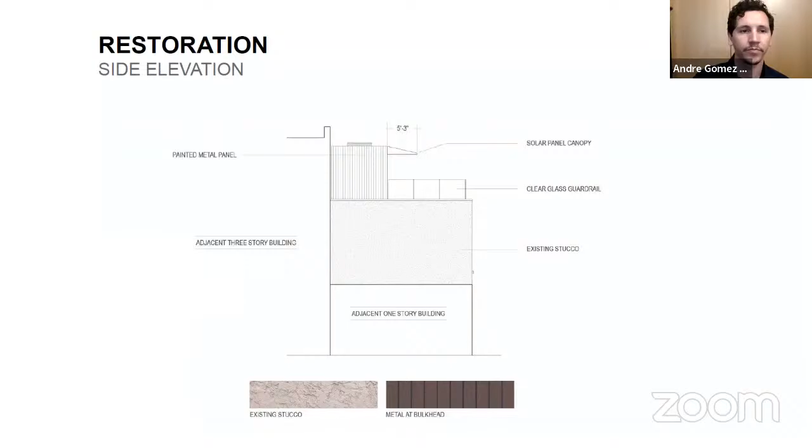The other side facade, very similar to the other one, 1-story adjacent building, 1 story of stucco, then the painted metal above. Good to talk about some of the construction details, that's just been a part of our design intent and part of our conversation with the agency so far. So a couple typical details of the window and also the front door.

I think what's most important here is that we've chosen to set the window back 1 brick module just to expose the side of the brick, which, as far as we can tell from the tax map image, that was the original detailing, that the side brick was exposed. So keeping in line with that, just to show that the brick turns the corner and to give it a good sense of strength there.

As I've been saying, aluminum windows, the intention is that the entire window opens and will be a long-term solution for the client.

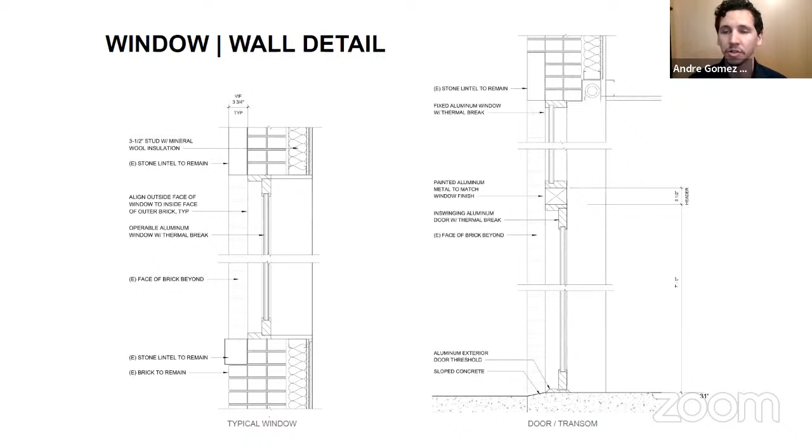I'm going to talk a little bit more about the bulkhead. Start with a plan, we have a stairway to roof, that's about 2/3 of the bulkhead there. The remaining third is for solar equipment and miscellaneous mechanical, which is a good thing because a lot of our utilities are hidden away then, keeping that out of sight.

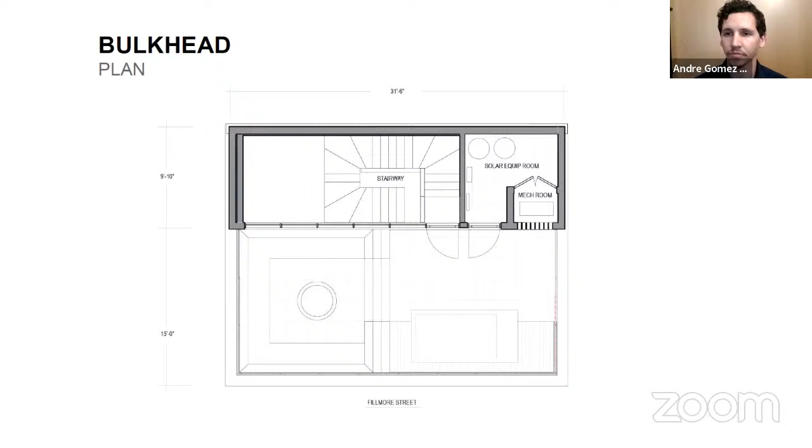The bulkhead steps 15 foot back from the face of facade, which is fairly consistent with what the original bulkhead design was, which you can see in the tax map image. There was an original bulkhead there. So we're really just kind of recreating this original mass and doing so in a current, up to date condition.

Street section from across Fillmore. The bulkhead is out of the line of sight when directly across. You do see a glimpse of the canopy.

As I detail the canopy here, you can see it's really mostly solid in appearance. So no exposed structure. We have a solid panel underneath it, and then above it is the solar panel. The solar panels are basically one next to another, so even if you could see up there, which you can't from the groundscape, of course, there's basically no steel exposed. And then we've wrapped the edge of this detail with a little metal closure plate, so it just kind of becomes like a solid, real sleek thing.

But yeah, the bulkhead's out of view, and then all of the equipment on the roof, which is just a couple of miscellaneous amenities for the owner, those are also out of view, as you can see from this section here.

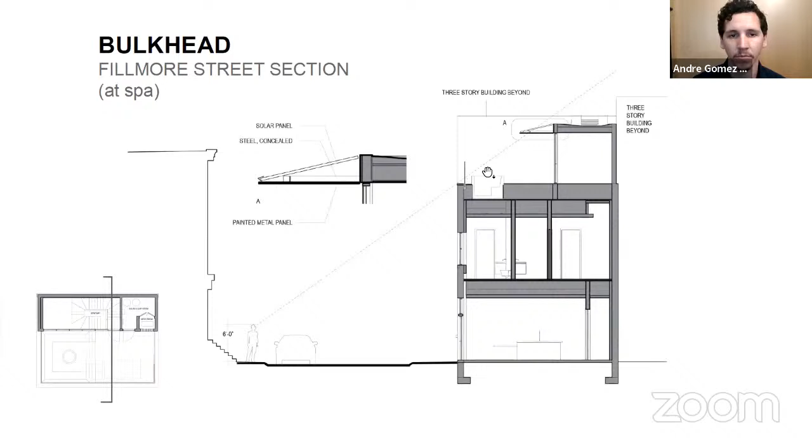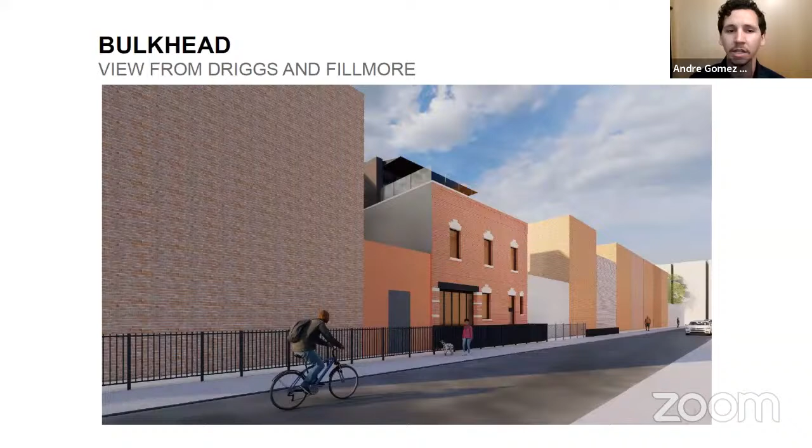As you head east on Fillmore towards the row housing, the row housing starts to hide some of the view of the bulkhead, and that viewing angle is relatively short in terms of the length on the street where it's actually visible. Just comparing this back to the image that we have here from 1940, you see that the bulkhead is relatively in the same position and same size as it originally stood.

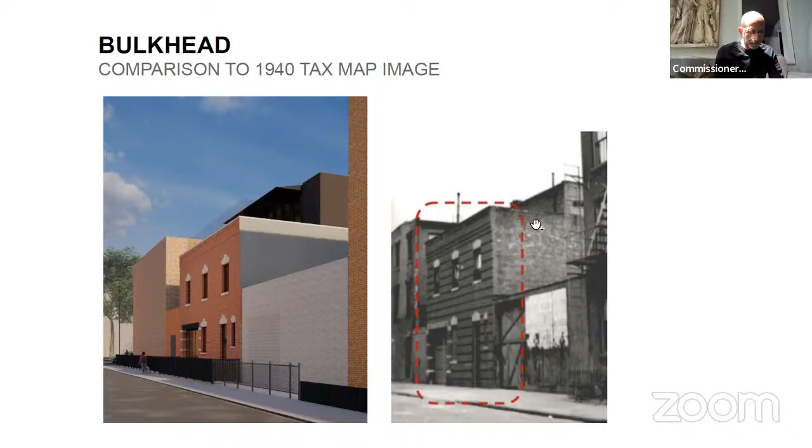Okay, so the hearing is closed and we'll begin our discussion.

This includes restoration, which technically can be done at staff level, of the masonry, but it also includes what we're looking at: new windows and doors on the facade, and the rooftop addition, bulkhead, and other elements, including the glass railing and the canopy for the solar panels.

So we'll begin our discussion. Commissioner Lutfy, would you start this one? Sure. This is a lovely project, and I want to thank the applicant for making sure they're working on the details and restoring the building.

It'll be a lovely addition to the landscape. I just want to make a couple of recommendations, and many of them have already been suggested by the community members who have spoken. So I do agree that the building should, as they were in the past, be 1/1. The facade looks a little naked right now without that cut in the windows.

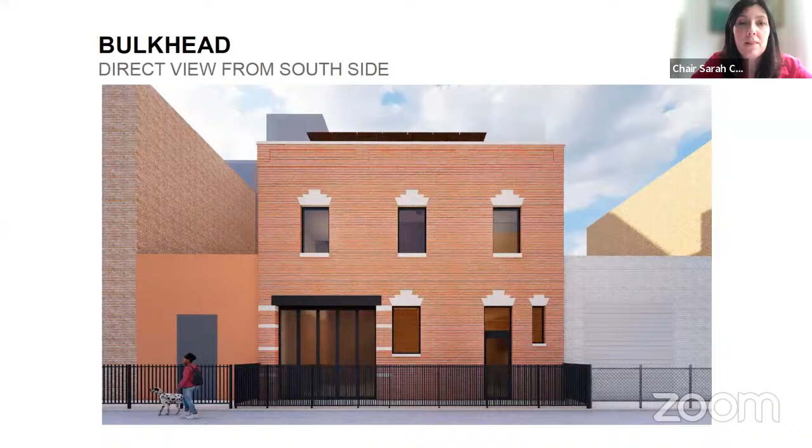I recommend approval, finding that the work will not damage or eliminate any significant architectural features, that the proposed folding garage door featuring metal framing and translucent privacy glazing is a modern interpretation of the historic infill and will help facilitate this building's adaptive reuse, that the placement and height of the new areaway fencing will align with fencing at the neighboring properties, supporting a unified streetscape composition, that the proposed areaway ironwork is simple in design and will not call attention to itself, that the massing and visibility of the proposed rooftop addition set back from the front facade and aligning with the rear and lot line facades will approximate the massing and visibility of the historic bulkhead, that the design and materials of the proposed rooftop addition consisting of a glazed curtain wall and dark bronze metal cladding will add a contemporary layer to the evolution of this building, that the presence of visible railings, if properly scaled and designed, will not detract from this utilitarian building, and that the proposed work will not detract from the special architectural or historic character of the building or the Fillmore Place Historic District.

However, I recommend that the applicants continue to work in consultation with staff to make a few revisions, including replacing the proposed single light windows with 1/1 double hung windows, eliminating or reducing the canopy and putting the solar panels on the roof of the bulkhead to reduce visibility, and setting back the glass railing or installing a metal cable railing in lieu of the glass railing. And finally, to continue to work with staff on details such as the bottom rail on the door and the final details of the ironwork and garage door and its lintel.